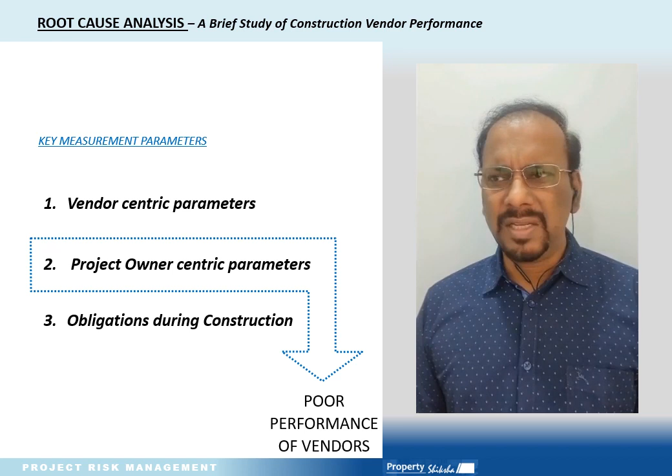I did a root cause analysis to understand the parameters that influence construction vendor performance. This presentation is in continuation to the last presentation where we discussed project owner centric parameters that lead to poor performance of vendors. All these risks need to be planned in the risk management plan during the planning stage. So let's see what these points are.

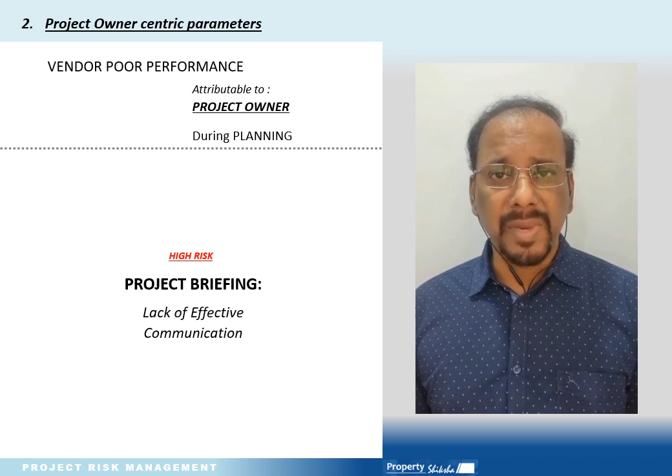Under project risk management, my next point towards project owner centric parameters leading to poor performance of vendor but attributable to project owner is project briefing, which is poor because of lack of effective communication. It is to be noted that this is a high risk point.

The plausible risk strategy to handle this kind of risk can be to avoid the risk through effective communication. Here, it is important to ensure that there are no gaps between what is conveyed to vendors and what they understand of project owners' expectations and priority. Also, all relevant verbal or written communication should be documented and preferably made a part of the contract. If required, you should ask for a dedicated communication resource to avoid any gaps during execution, and this can be made a precondition for smooth coordination.

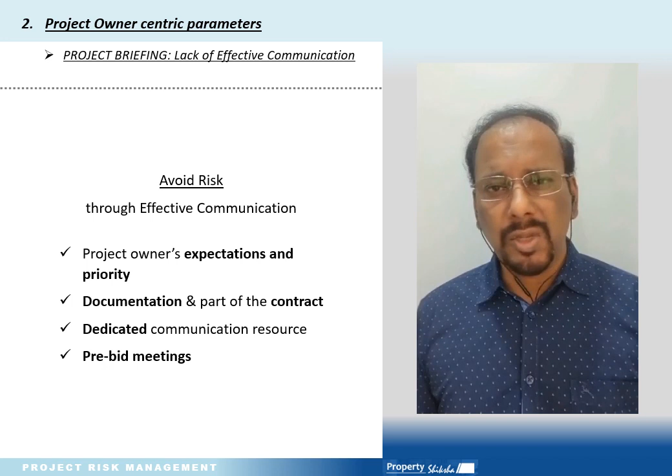Also, it is always better to conduct pre-bid meetings with all the vendors, maybe separately or jointly, while explaining the scope, expectations, drawings, responses to all the queries, etc. So this point can be concluded with effective communication through meetings, MOMs, detailed RFP, and responses to queries. This is the only way to avoid any gaps related to important briefs, commitments, and understanding of project scope.

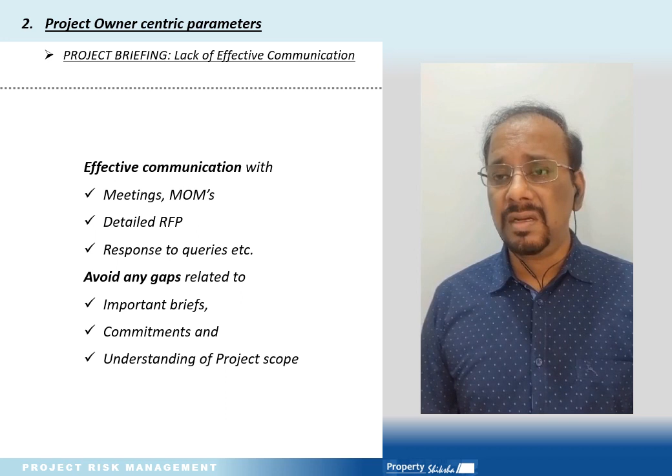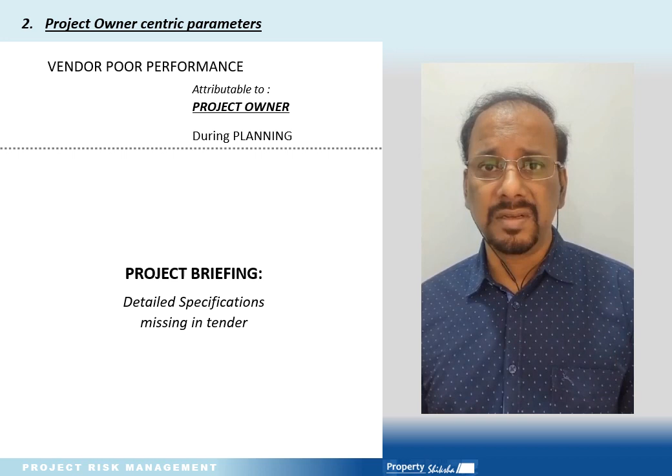Under project risk management, my next point towards project owner-centric parameters leading to poor performance of vendor but attributable to project owner is project briefing, related to detailed specifications missing in tender. The plausible risk strategy to handle this kind of risk is to avoid risk by providing detailed specifications during the pre-bid stage. We need to understand that detailed specifications and work methodology are important to execute the work as per expectations and achieve the desired job quality.

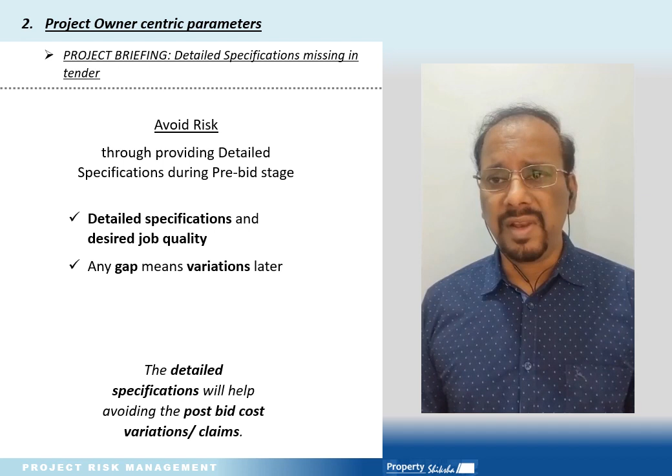Also, any missing step in the work methodology means missing cost consideration towards that step. Any such gap means a lower price during the bid proposal stage, which will ultimately lead to variations later during the construction stage to achieve the desired quality. So we can conclude this point: providing detailed specifications will help avoid post-bid cost variations or any claims.

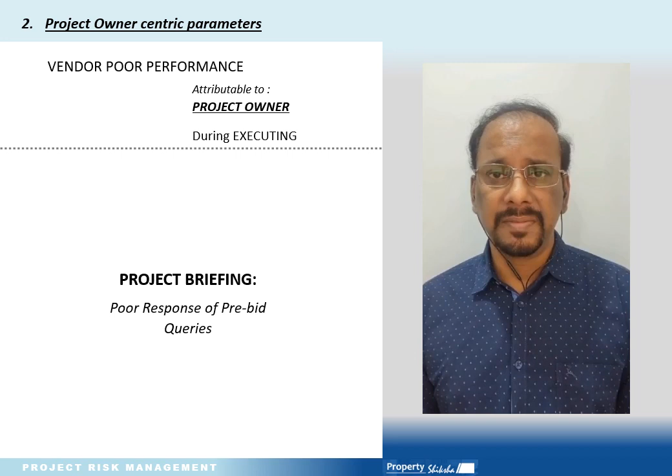Under project risk management, my next point towards project owner-centric parameters leading to poor performance of vendor but attributable to project owner is again project briefing, related to poor response to pre-bid queries. The plausible risk strategy to handle this kind of risk is to avoid risk by providing detailed responses to bidders' project queries during the pre-bid stage.

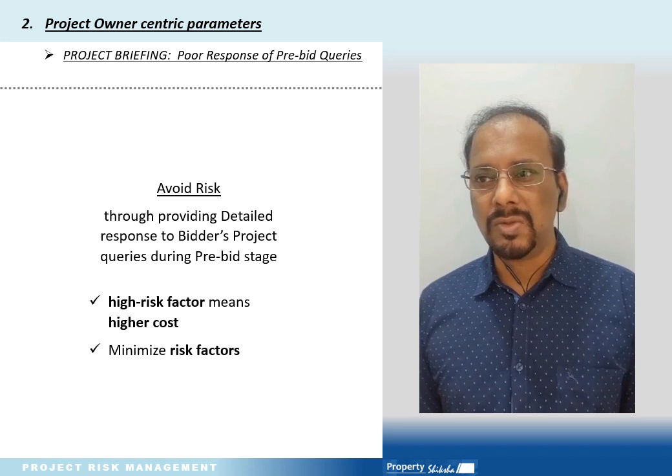It is pertinent to note that a higher risk factor on the project leads to higher cost. In such cases, the contractor generally jacks up the cost to cover the risk. It is better to keep such risk factors in the project minimum while providing maximum clarity or clear responses to contractors' queries. So we can conclude this point: providing detailed responses to bidder queries during the pre-bid stage will certainly help towards competitive bidding while reducing risks and associated cost.

Also, if you find the quoted prices are still on the higher side than expected, then the contractor should be consulted on the basis of the estimates for further review. And if required, the factors need to be addressed to bring the cost in range.

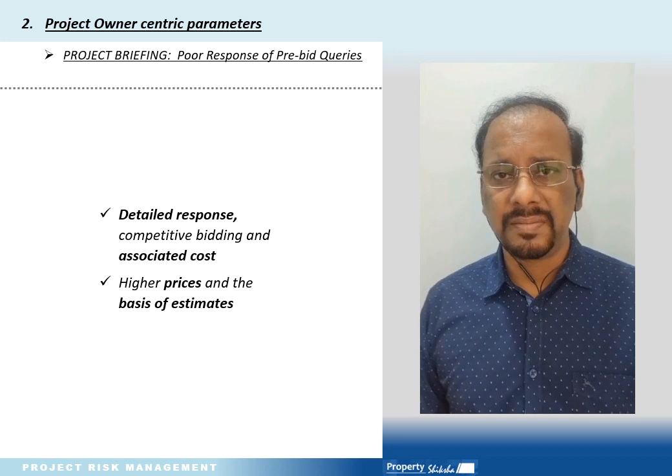So this is the end of this presentation. In this presentation, I covered 3 points related to project owner centric parameters that may lead to poor performance of vendor at site if not addressed properly. All these 3 points are related to project briefing: first, lack of effective communication; second, detailed specifications missing in tender; and third, poor responses to pre-bid queries.

Generally, project briefing is very important for the project. Clarity in briefing, detailed specifications, and effective responses to queries can certainly minimize the variations and change orders towards the given scope, which is very important to control the cost during execution. So far I have covered 7 points in total towards project owner centric parameters, and I will be covering more points in coming presentations.